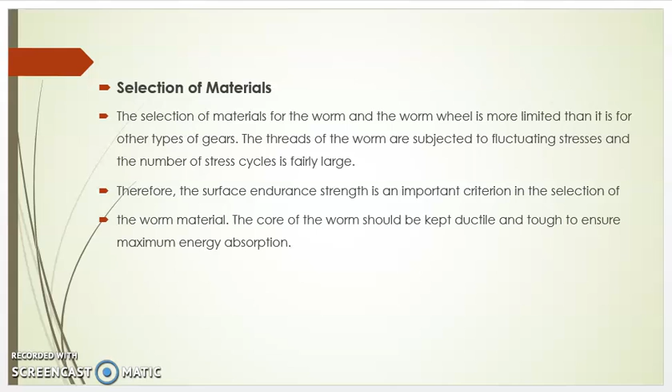The worms are therefore made of case hardened steel with a surface hardness of 60 HRC and a case depth of 0.75 to 4.5 mm. The following varieties of steel are used for the worm: normalized carbon steels 40C8 and 55C8, case hardened carbon steels 10C4, 14C6, case hardened alloy steels 16Ni80Cr60 and 20Ni2Mo25, nickel chromium steels 13Ni3Cr80,

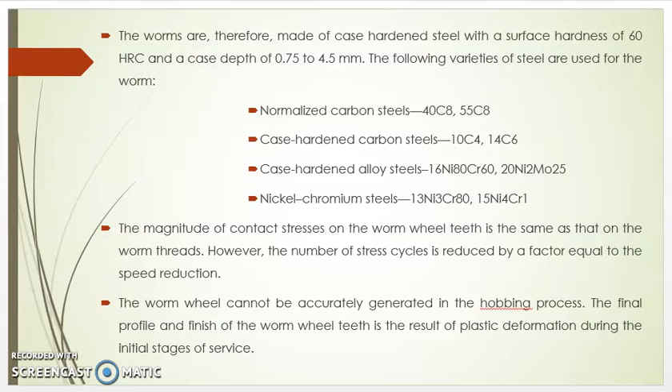15Ni4Cr1. The magnitude of contact stresses on the worm wheel teeth is the same as that on the worm threads. However, the number of stress cycles is reduced by a factor equal to the speed reduction. The worm wheel cannot be accurately generated in the hobbing process. The final profile and finish of the worm wheel teeth is the result of plastic deformation during the initial stages of service. Therefore, the worm wheel material should be soft and conformable.

Phosphor bronze with a surface hardness of 90 to 120 BHN is widely used for the worm wheel. Phosphor bronze worm wheels are sand cast and chilled, or centrifugally cast. Phosphor bronze is costly, and in case of worm wheels with large dimensions, only the outer rim is made of phosphor bronze. It is then bolted to the cast iron wheel.

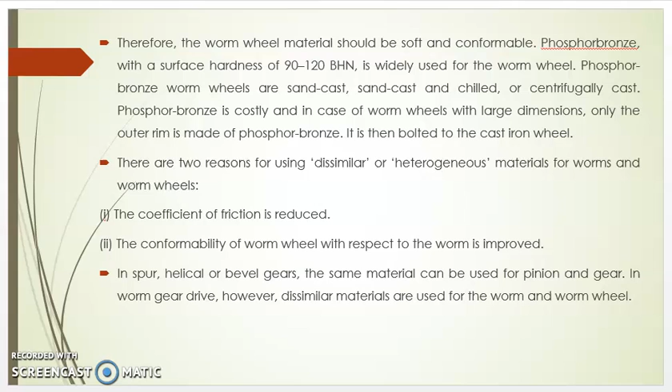There are two reasons for using dissimilar or heterogeneous materials for worms and worm wheels. First, the coefficient of friction is reduced. Second, the conformability of worm wheel with respect to the worm is improved. In spur, helical or bevel gears, the same material can be used for pinion and gear. In worm gear drive, however, dissimilar materials are used for the worm and worm wheel.

Now we will see strength rating of worm gears. Since the teeth of worm wheel are weaker than the threads of worm, the design for strength can be based on Lewis equation as applied to the worm wheel teeth. In this case, it is not necessary to design the worm on the basis of strength. The worm gears are usually designed according to national and international codes. There are two basic equations, beam strength and wear strength equations.

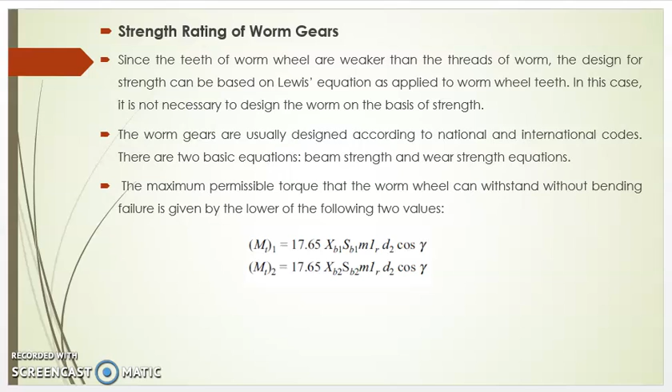The maximum permissible torque that the worm wheel can withstand without bending failure is given by the lower of the following two values. MT1 is equal to 17.65 Xb1 Sb1 into m into lr into d2 cos gamma, and MT2 is equal to 17.65 Xb2 into Sb2 into m into lr into d2 cos gamma,

where MT1 and MT2 are the permissible torque on the worm wheel in N-mm, Xb1 and Xb2 are speed factors for strength of worm and worm wheel, Sb1 and Sb2 are bending stress factors of worm and worm wheel, m is module in mm, lr is length of the root of worm wheel tooth in mm, d2 is pitch circle diameter of worm wheel in mm, gamma is lead angle of the worm.

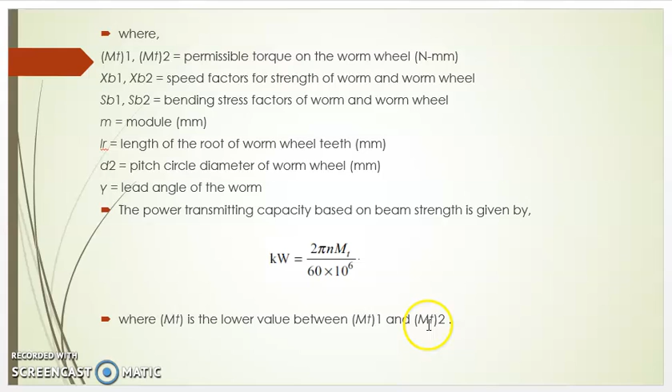The power transmitting capacity based on beam strength is given by kW is equal to 2 pi n into Mt divided by 60 into 10 raised to 6, where Mt is the lower value between MT1 and MT2. Here if MT1 is less, then we have to take n1, and if MT2 is less, then we have to take n2.

Now next we will see wear rating of worm gears. The maximum permissible torque the worm wheel can withstand without pitting failure is given by the lower of the following two values. MT3 is equal to 18.64 into XC1 into SC1 into YZ into D2 raised to 1.8 into M, and MT4 is equal to 18.64 into XC2 into SC2 into YZ into D2 raised to 1.8 into M,

where MT3 and MT4 are the permissible torque on the worm wheel in Newton mm, XC1 and XC2 are speed factors for the wear of worm and worm wheel, SC1 and SC2 are surface stress factors of the worm and worm wheels, YZ is the zone factor. The power transmitting capacity based on wear strength is given by kilowatt is equal to 2 pi n MT divided by 60 into 10 raised to 6, where MT is the lower value between MT3 and MT4.

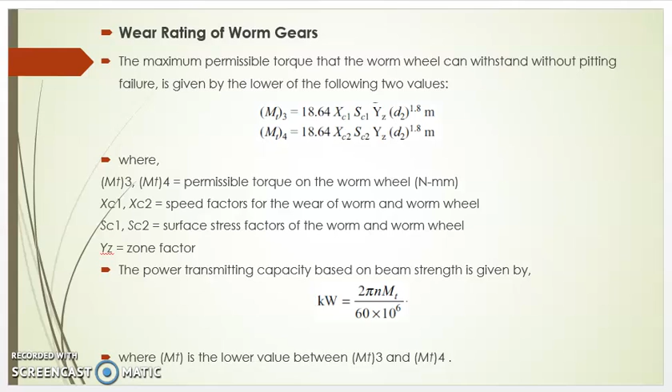Now we will see thermal considerations in worm and worm wheel. Thermal considerations are important because of high speed reduction in case of worm and worm wheel; a large amount of heat is generated. Therefore, to dissipate the heat, we need to consider thermal considerations in case of worm and worm wheel. The efficiency of a worm gear drive is low and the work done by friction is converted into heat. When the worm gears operate continuously, considerable amount of heat is generated.

The rate of heat generated Hg is given by Hg is equal to 1000 into bracket 1 minus efficiency into kilowatt, where Hg is the rate of heat generation in watt, eta is the efficiency of worm gears in fraction, kilowatt is the power transmitted by gears in kilowatt. The heat is dissipated through the lubricating oil to the housing wall and finally to the surrounding air.

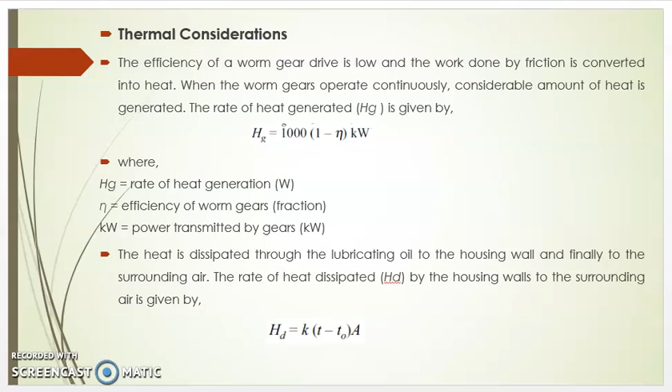The rate of heat dissipated HD by the housing walls to the surrounding air is given by HD is equal to K into bracket t minus T naught into A, where HD is the rate of heat dissipation in watt, K is the overall heat transfer coefficient of housing walls in watt per meter square degree Celsius, small t is the temperature of the lubricating oil in degree Celsius, T naught is the temperature of the surrounding air in degree Celsius, A is the effective surface area of housing in meter square.

Therefore, equating heat generation to the heat dissipation, we have 1000 into bracket 1 minus efficiency into kilowatt is equal to K into t minus T naught into A. Rearranging the terms, we get two equations. Kilowatt is equal to K into t minus T naught into A divided by 1000 into bracket 1 minus efficiency, equation 1, and small t is equal to T naught plus 1000 into bracket 1 minus efficiency into kilowatt divided by K into A, equation 2.

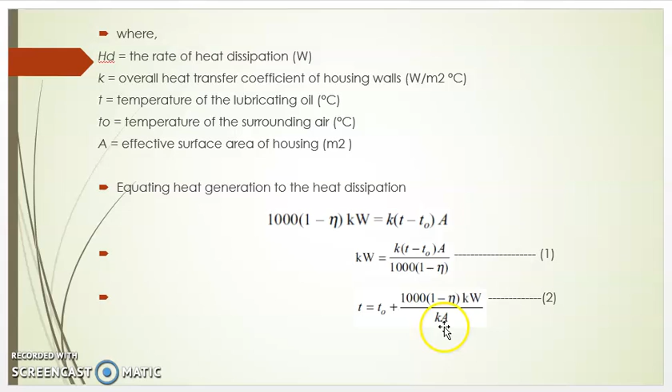Equation 1 gives the power transmitting capacity based on thermal considerations. Equation 2 gives the resultant temperature of the lubricating oil for a given power transmitting capacity. The overall heat transfer coefficient under normal working conditions with natural air circulation is 12 to 18 watt per meter square degree Celsius. This value can be further increased by providing a fan on the worm shaft and arranging the fins horizontally along the stream of air. In such cases, it can be taken as 20 to 28 watt per meter square degree Celsius.

It has been observed that the maximum permissible temperature for commonly used lubricating oils is 95 degrees Celsius, above which it loses its properties and there is a danger of gear tooth failure due to seizure.

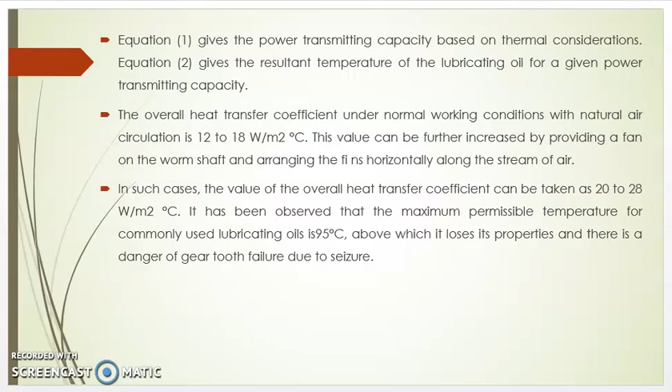Okay. Thank you very much. This is the end of the theory of the worm gears.